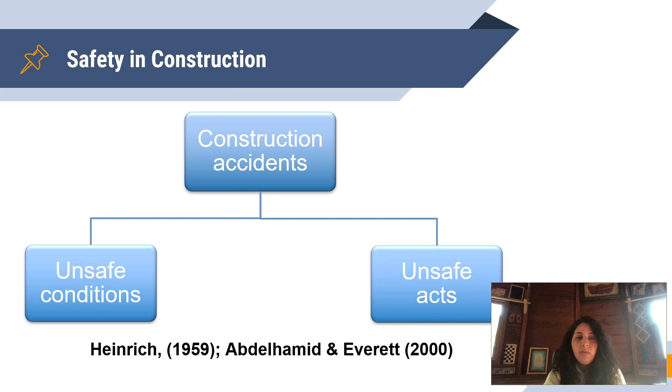Unfortunately, the traditional practice of safety inspection by a safety inspector who navigates the site is very tedious and time consuming. But the good thing is that the advances in technology can help us in solving this problem. Specifically, the use of drones has recently been introduced into the world of construction.

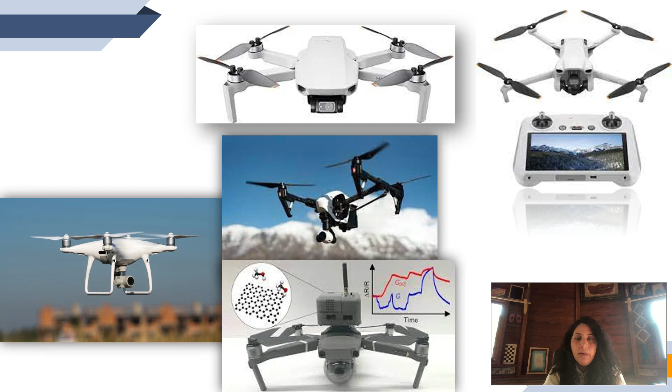As part of the safety management system, the term UAS, Unmanned Aerial System, is used to describe the system that is composed of one or more drones or UAVs, in addition to a ground control station and any other devices that can be installed on the drone, such as a camera, a microphone, or even sensors.

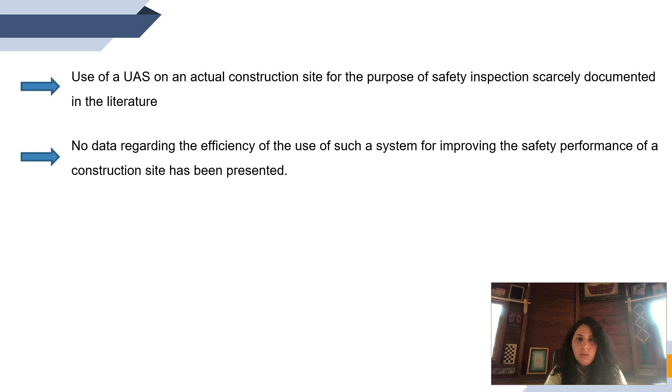Now, the use of a UAS on an actual construction site for the purpose of safety inspection has scarcely been documented in the literature. And this is why there is no data regarding the efficiency of the use of such a system on improving the safety performance of a construction site. And since the collection of this data needs a long time with application and not just one but several projects, this study instead employs simulation modeling in order to simulate the dynamics of a real construction site.

So the main aim of this study is to understand the long-term effects of using drones for safety inspections on the safety performance of construction sites compared to the traditional practice of safety monitoring by a safety officer.

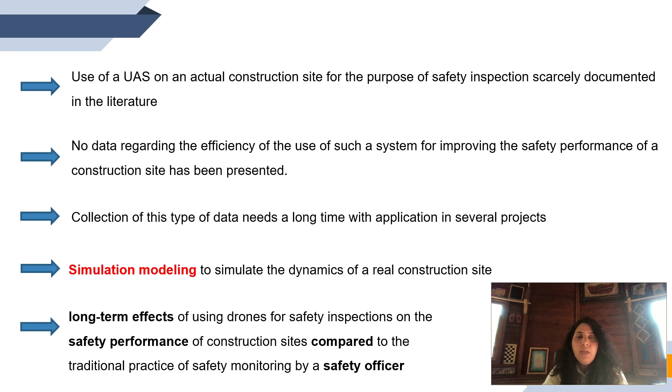So, what are simulation models? Simulation models are computer models that we can use to mimic any real life system or process. So, if we have a problem related to a certain system that we need to solve, we can use simulation modeling in order to mimic the dynamics of this system in order to find a solution for this problem. So, simulation models provide a flexible virtual world where we can create nearly anything imaginable.

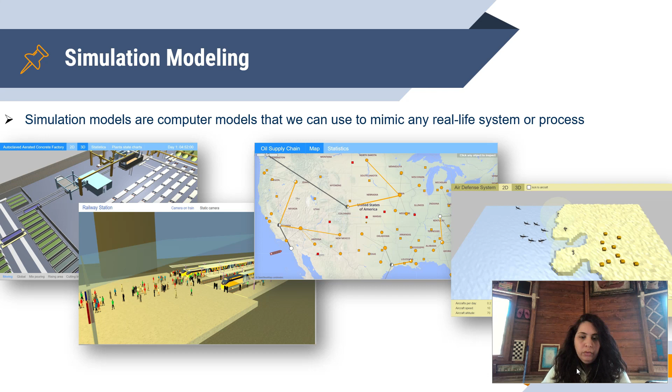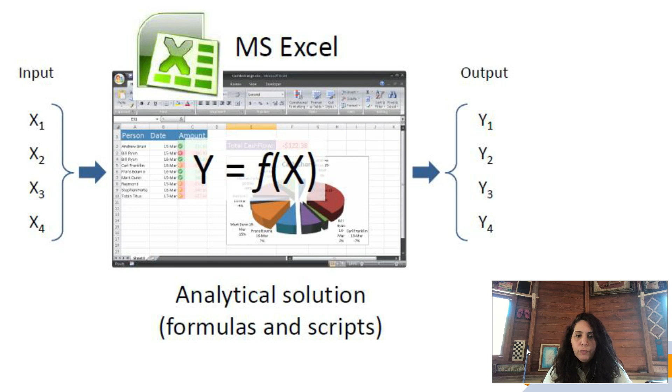Now, in our daily lives, we use many kinds of model. And one of the most popular models we use is actually the ones we do in Excel sheets. So these kinds of models use formulas and scripts in order to find analytical solutions for the problems at hand. However, we have some cases that are sometimes too complicated to use Excel for. We have cases where we have too many variables involved, nonlinear influences, time and causal dependencies, counterintuitive behavior, and many uncertainties. So, for these cases, the analytic formula based solution is either hard to find or simply doesn't exist.

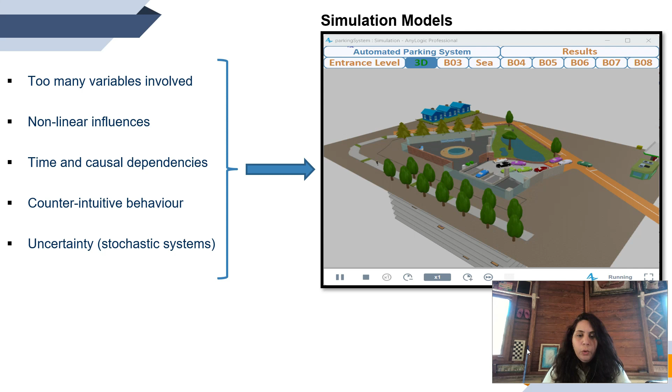So, this is why simulation models are perfect for these situations because they allow for easily incorporating all these factors and uncertainties. So, one of the most important features of simulation models is that they provide a risk-free world that we can play and test with. So, when we have a problem that we need to solve, we cannot afford to experiment with the real object because building, destroying, and making changes may be too expensive, dangerous, or just impossible, such as the cases when the system does not even exist yet.

So we can build the simulation model that will resemble the real life system. And using the simulation model, we will find a solution for the problem that we have to finally implement it on the actual system. And in addition to this, these models can help to visually observe the dynamics of the model system. You can even visualize the model in 3D and interact with it through graphical user interfaces, for example.

Now, some of the many uses of simulation models are to predict the output of a certain system, to describe how the system behaves and why it behaves the way it does, to experiment with if-then scenarios, to design and test systems that do not even exist yet, to measure the performance of a system, to use as a training tool for practitioners, to find system bottlenecks, and to design and improve processes.

So, in our case, we are going to use the simulation model in order to measure the safety performance of the system. So, let's see the conceptual model that we are going to translate into the simulation model. So we have two conceptual frameworks that we need to compare. The first one is related to the safety inspection process by a safety officer, and the second one is the safety inspection process by a UAS.

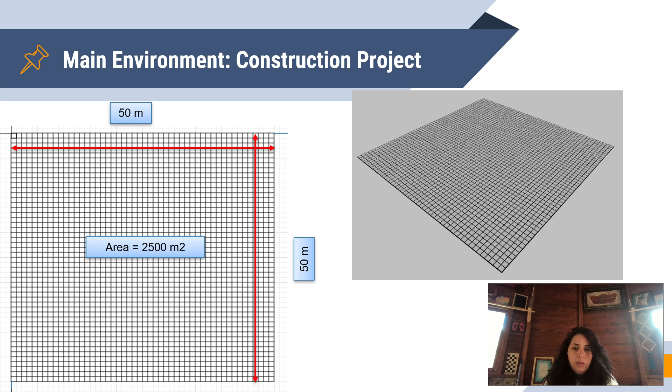Now, regarding the cognitive process of the worker safety behavior, this process is completely adopted from a study by Shwa et al. and applied in the model. So the workers in the model are going to be characterized by their risk perception, their risk attitude, as well as the perceived subjective norms, which are the norms that they perceive from their coworkers as well as the management.

So, based on these interactions, as well as any accidents that the worker might be subject to during his work, his safety behavior and characteristics are going to change with time. For the first case, which is the safety inspector, this inspector is going to wander the site in order to check for any non-compliance with the safety standards.

And the main characteristic of this inspector is going to be the time needed to conduct this inspection, and accordingly, the number of inspections that can be done in one day. Now, based on a semi-structured interview done with safety inspectors in Lebanon, the amount of time needed to do an inspection was deduced and used in the model.

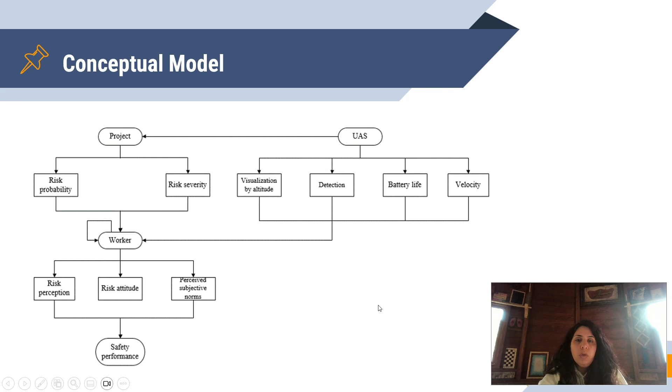And also, according to these interviews and previous studies, we note that only one inspection is usually done on the site every day. And this is the rate of inspections that was also used in the model. Now, moving on to the UAS process. So the details and the characteristics of this process are all adopted from a study by de Melo et al.

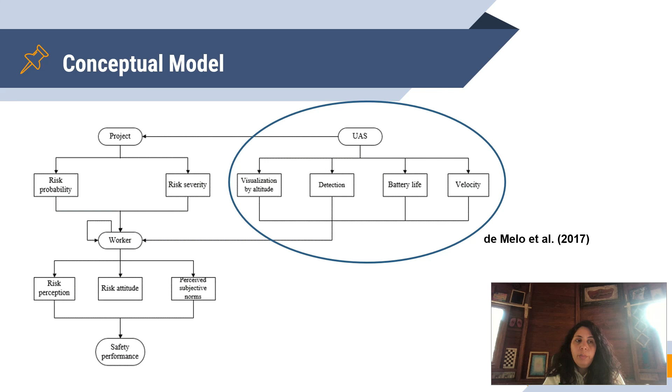A UAS consisting of one drone mounted with a camera and a ground control station are considered to be doing the monitoring process. And the project is considered to be in the concrete phase. So the assumption is that the drone is going to navigate the site externally without going into the built parts of the building. And during one inspection mission, the drone is going to inspect the site at three different levels: an overview, a medium view, and a close-up view.

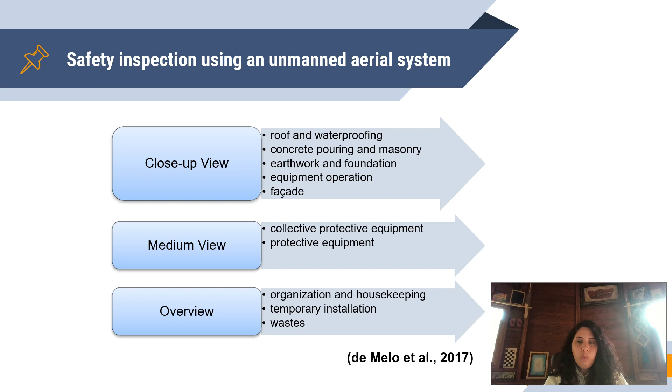And this is because at each of these levels, only certain requirements can be visualized, as you can see in this diagram. Now, the area of the footprint of the camera, which is the area that can be detected by the camera on the drone, is related to the characteristics of the camera as well as the height in which the camera is operating from the ground.

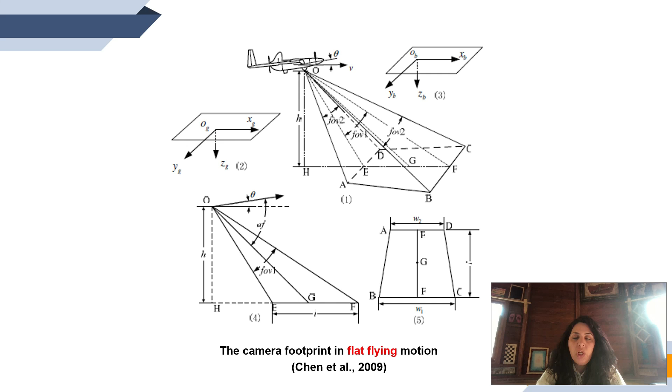So in our study, the camera is assumed to be following a flat flying motion, and accordingly, the dimensions of this footprint are calculated, as you can see in this figure, based on the methods and the equations from a study by Chen et al. Now let's take a look at our simulation model in order to see the drone in action. First, we're going to have a quick tour in our construction site.

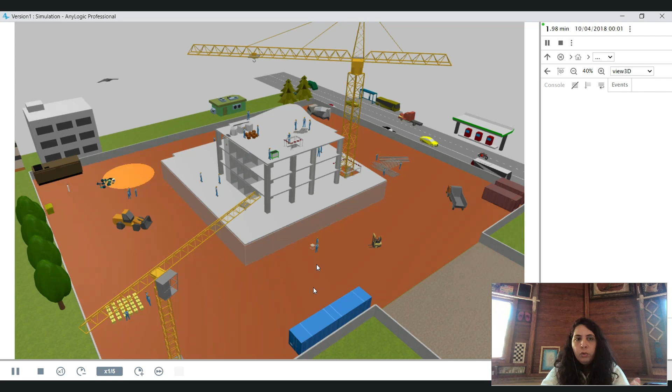So as you can see, this is the construction site in the concrete phase as mentioned, and we can see different activities happening, and this is our drone. And now we are going to see how the drone will function. So as you can see, the drone moves a certain distance and then stops for a few seconds in order to take the needed photos and videos and then transmit them to the ground control station in real time.

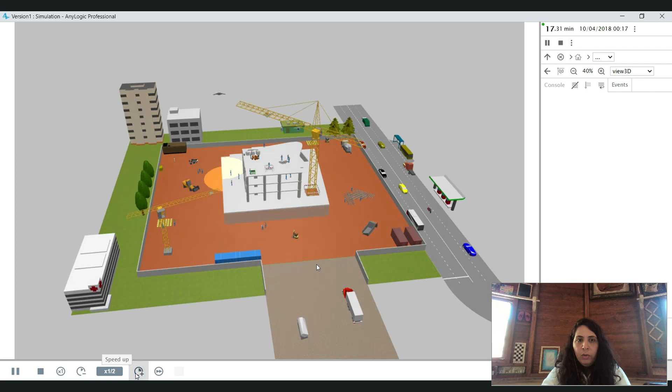And this process will be repeated over and over again until the whole site area is covered. And as you can see, we can see the area detected by the drone on the ground. Now, at this point, you will see the drone moving from one view to the other. So before it was at the lower view, and now it's at the middle view. And as you can see here, it repeats the same process again.

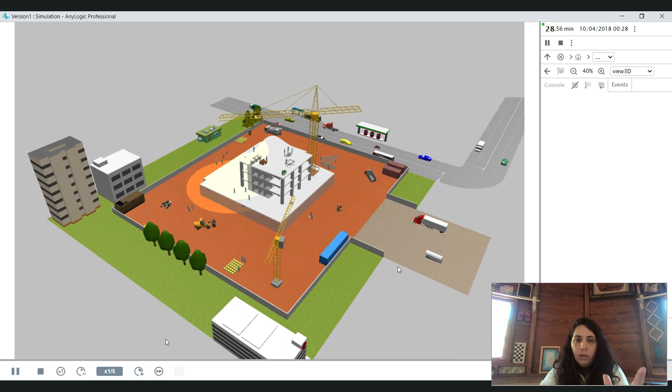But now the area that is being detected on the ground is bigger because the height of the camera from the ground is also bigger. And now the drone is going to move from the middle view to the overview, which is the highest view. And as you can see now, the area detected by the camera is much bigger, and the whole site will be covered in only a few steps.

Moreover, the collected photos and videos by the drone are going to be scanned for detection not manually or visually by a human, but automatically by a certain algorithm. So again, only a certain percentage of requirements will be detected through the algorithm based on the precision of this algorithm. Now, the details for the functioning of this algorithm, as well as its performance, are all adopted from a study by Soheila Antar, and the percentages used accordingly.

And finally, the last two characteristics of the UAS that are also used in the model are the battery life as well as its velocity. So let's check out the results of our simulation model.

So what we need to do is to measure the safety performance. The safety performance is measured using certain indicators. Lagging indicators such as the incident rate show the magnitude of occurrence of accidents, and they are reactive in the sense that they collect after the fact statistics. Leading indicators, on the other hand, provide metrics that monitor the process during its implementation and thus allowing managers to proactively respond to these collected results. Now, ideally, a combination of both indicators should be used.

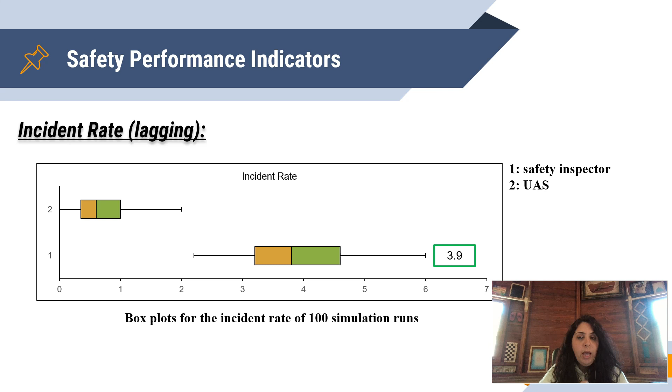So in order to get reliable results, the model was run 100 times. And as you can see, this figure shows the box plots for the incident rate for the 100 simulation runs for the two cases. The first one is for the case of the safety inspector, and box plot 2 is for the case of the UAS. So as we can clearly see, all the values for the case of the UAS are less than the minimum value in the case of the safety inspector of the 100 simulation runs. And it is to note that the mean for the case of the safety inspector is equal to 3.9, and the mean for the case of the UAS is equal to 0.63.

Now, the second indicator, which is a leading indicator, is the safety behavior. This indicator shows how the unsafe behavior of workers changes with time along the project duration. So the model is run for 1 year and the change is traced. So as we can see, for the case of the UAS, the unsafe behavior of workers decreases along time with a fast rate at the beginning and a slower rate towards the advanced stages of the project. And this is mainly because at the end of the project, most of the workers will have already learned and acquired the acceptable safety behavior, bearing in mind that the same work crew is considered along the whole simulation duration. And we have a total decrease of 13.61%.

Now, for the case of the safety inspector, surprisingly, the unsafe behavior of workers actually increased along the project. And this is explained by the fact that the workers are not getting warned enough about their unsafe behavior. So, as we mentioned earlier, only one inspection is done by the inspector per day. And we found out from the model that for the used site area, the inspection takes around 3 hours. This means that during the 3 hours, some of the unsafe behavior of the workers will be detected, and so they will be warned. However, for the other 5 or 6 hours in a day, any unsafe behavior will be missed, and so the workers will not be warned about it, and thus they will conceive that this unsafe behavior is acceptable, and this is why they will continue behaving unsafely.

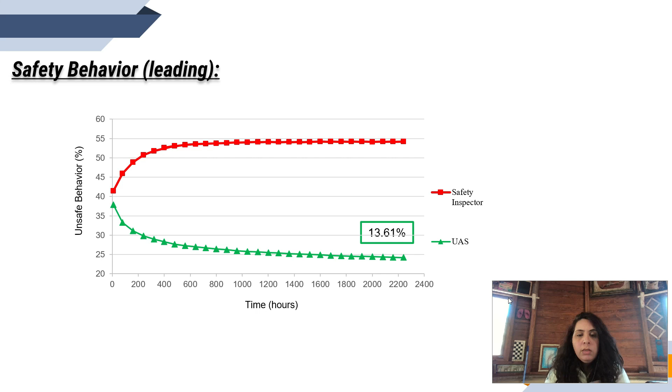Now, this clearly shows that employing a safety inspector is not enough on its own as a safety management practice. It should be accompanied by other practices such as safety training, toolbox meetings, and feedback and open communication about safety.

And finally, the third indicator, which is also a leading indicator, is the hazards reported. This indicator shows the percentage of unsafe conditions that were able to be detected along the project. So this graph shows the box plots for the 100 simulation runs, one for the case of the safety inspector and two for the case of the UAS. So as we can see, the percentage of hazards detected is much higher in the case of the UAS.

Now, this high percentage detected despite the restrictions imposed by the percentage of visualization and the percentage of detection by the algorithm is mainly due to the number of inspections that were able to be done per day by the UAS. So, for example, for the site area used in our model, the drone was able to conduct the inspection 8 times each day, which means that if an unsafe condition was not detected or visualized in the first inspection, there is still good probability that it will be visualized or detected in the next inspection or the next before the condition actually changes.

So, as a conclusion, we can clearly see that we will have better safety performance in the case of using a UAS when compared to the use of a safety inspector. However, it's very important to note that using drones for inspection as a tool on its own is definitely not enough. It must be accompanied by a set of standardized procedures for adequately planning the flight mission, collecting and storing the data, analyzing this data, and taking the appropriate immediate and future actions accordingly.